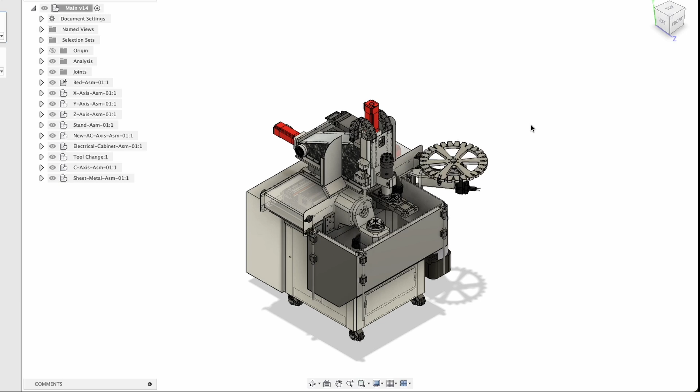This is Kasra. I'm going to show you in this Fusion 360 software how this machine that I'm designing will look like eventually. I thought it's necessary that we go through all the little details about how this machine is put together and how it will work.

So let's start with a few basics and facts. This machine is a compact 5-axis machine. All the moving parts apart from the A and C axis are made from granite, which have been machined and lapped and assembled together. The reason for granite is because it gives very good vibration dampening characteristics, as well as very good precision assembly.

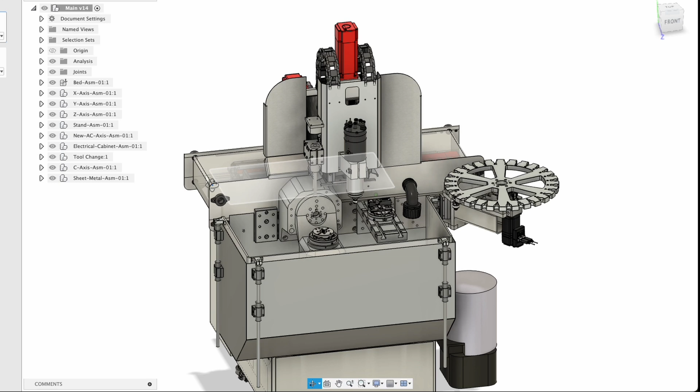The rotating axes are made from aluminium, and I will go through the reasoning behind that as well.

I spent over 2.5 years, I would say, designing this machine. Maybe 1 or 2 hours a day, sometimes a few hours over the weekend. Usually in the evenings every day I spent about an hour putting this assembly together. Obviously this is not the first version. I've been through multiple versions, and this is the one that I've decided to actually put together and manufacture.

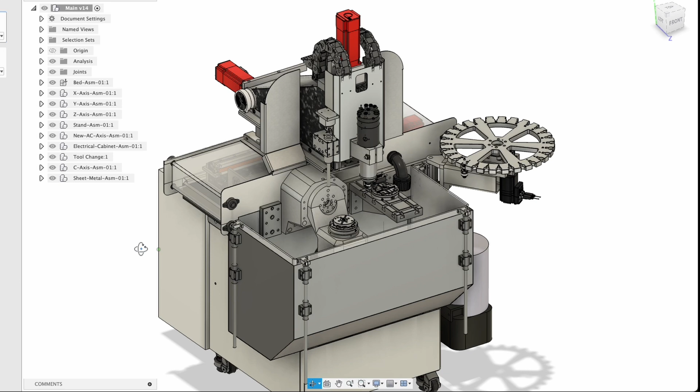Okay, let's start with the basics. So it has a stand, which I will show to you now.

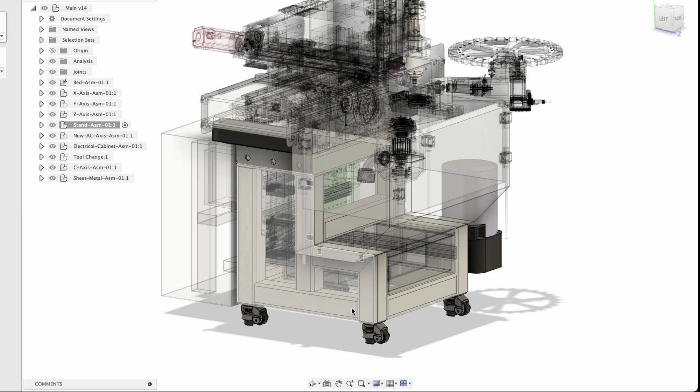This part on the bottom is just a metal frame that's been fabricated together. There are some live videos on the channel showing how I actually put this fabrication together. It's just a metal stand. There's nothing interesting really about it.

It is isolated from all the moving parts up top, so it's only holding the assembly of the machine and elevating it from the ground. So that's what it does.

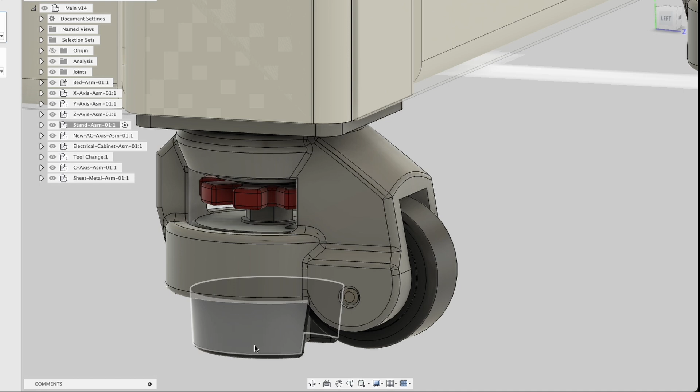It's a relatively sturdy stand, placed on these 4 casters, which have a sort of anti-vibration pad. You can raise them up by rotating these knobs, or lower them down, or in this case bring them up so that it will sit on these wheels.

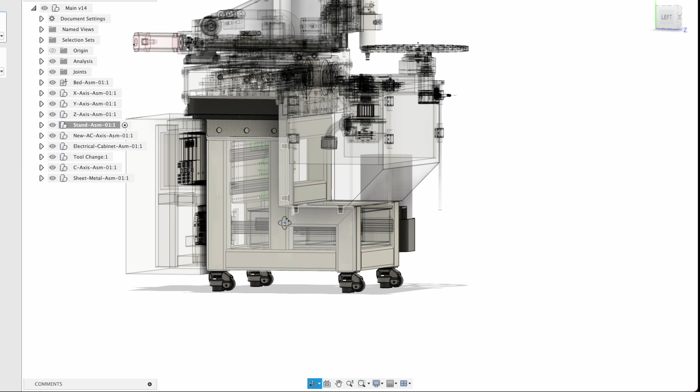These have bearings inside, and there's also a large bearing up top here, so it allows you to move the whole machine freely. Then once you are in place, you will bring these feet down and you can level the machine as well. So that's how the stand looks like.

Then we've got what I have named the bed assembly. I can probably just get rid of all of that and show you this one. I should just turn the others off, I think it works better like this. You don't need to see these as well.

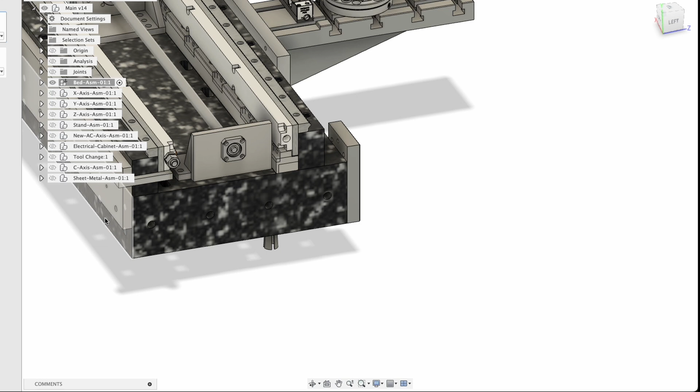The bed assembly, as I said, the main part is from granite stone. Then we've got these 2 granite parallels. This top face has been lapped, this front face has been lapped, and this rear face has been lapped as well, so these are 90 degrees to the top face.

Then we install these rails, which are quite interesting because they look like your usual X arrangement linear guideway with ball bearings that's been cut in half. We've got 2 of these.

These are a special type of rail that would allow you to have an adjustable preload, which can increase rigidity and accuracy. The actual rail itself is also pretty accurate, so the profile has been ground very, very accurately. I think I've got the reports for this particular rail, 600 millimeters long.

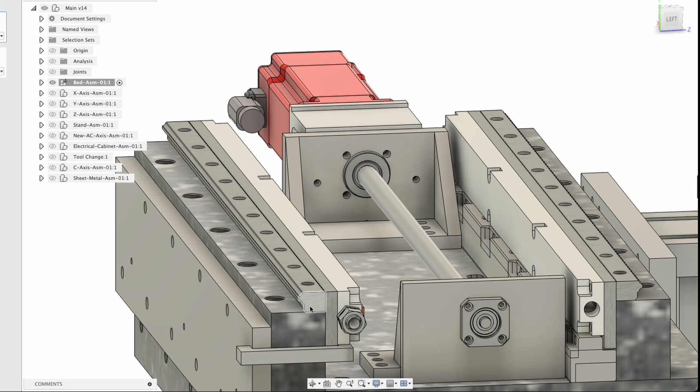For example, the thickness of the rail from this end to that end is better than 0.3 micron, something like that. And they come in pairs, so they machine these both together and grind them together, so they are pretty accurate stuff. The manufacturer is THK, a very well-known Japanese brand.

Then we've got a ball screw in the middle. This is a C0 double nut preloaded ball screw, ground obviously, 15 millimeter diameter, and the lead is 10 millimeters. So by rotating the ball screw shaft, the nut will move by 10 millimeters each time.

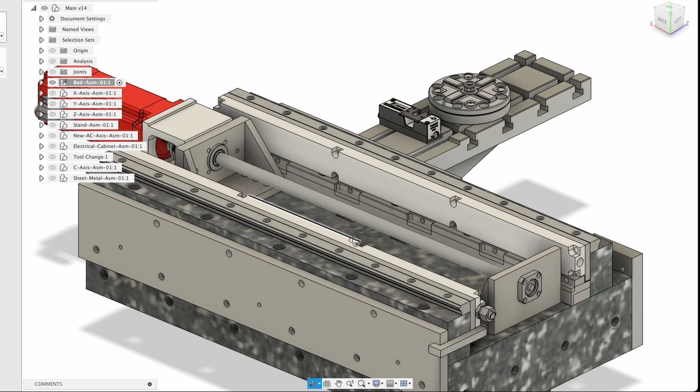Then we've got these housings for the bearings, the bearing housing of the ball screw, the support bearings. We've got a flange type over here and the flange type over there. All these metal parts are stainless steel. They've been machined, welded together, stress relieved, and then ground to a very good perpendicularity.

Then we've got this bracket, which is machined from one piece of aluminium. Then we've got these couplings, which is actually the wrong type of coupling that I used. It's not a disc coupling, it's a bellows coupling that I've used, but I haven't really changed it on the design.

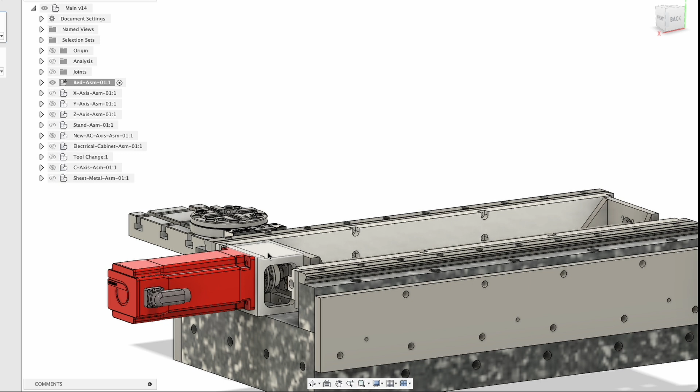Then we've got a 1 kilowatt, 6000 RPM servo motor from Beckhoff with an absolute encoder. Then we have a Renishaw absolute linear scale over here.

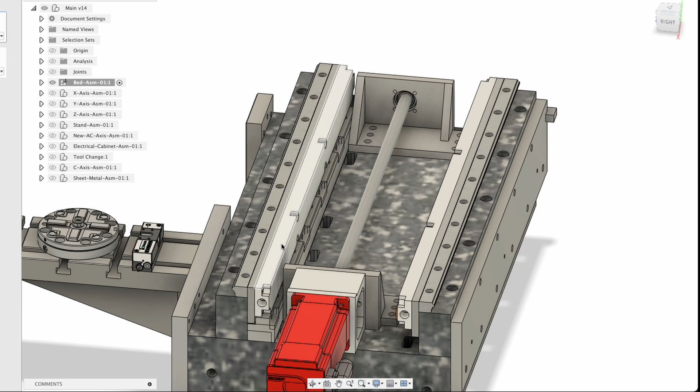We also have these aluminium pieces, this one and that one, and what these do is they have a cooling channel. The idea is to cool the whole rail down and keep the temperature controlled. They have an O-ring that goes around, and then we've got an inlet and outlet for water that goes through this, cooling this middle piece down, which is a stainless steel piece, and then the rail as well.

So that's your bed. Then on the front side of the bed, we have a couple of other plates. Then we have this sort of fixed table, which has T-slots. And there's another chuck there.

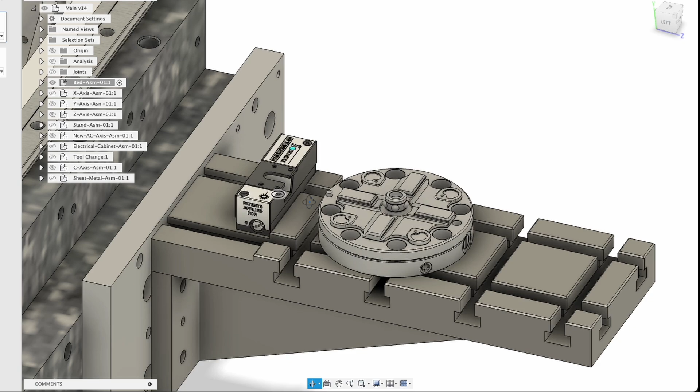Then we have the X-axis assembly. This one is again another piece of granite, which is this one. Then we have the linear blocks, so these are your linear blocks for those special type of rails. Then we have the ball screw nut, the housing of the ball screw.

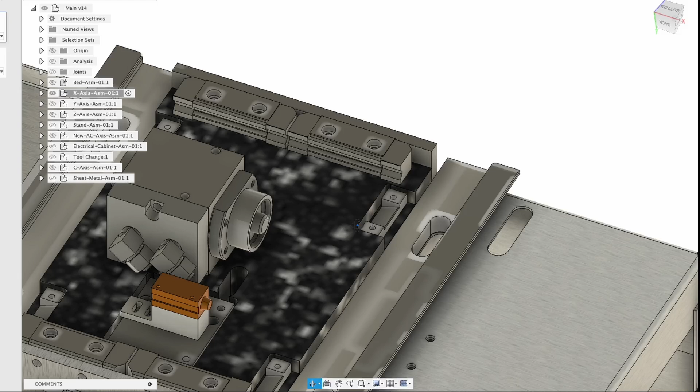Then we have another cooling pad to cool down the actual ball screw nut. Then we have the read head of that Renishaw linear encoder, and a few mounting brackets and bits and bobs.

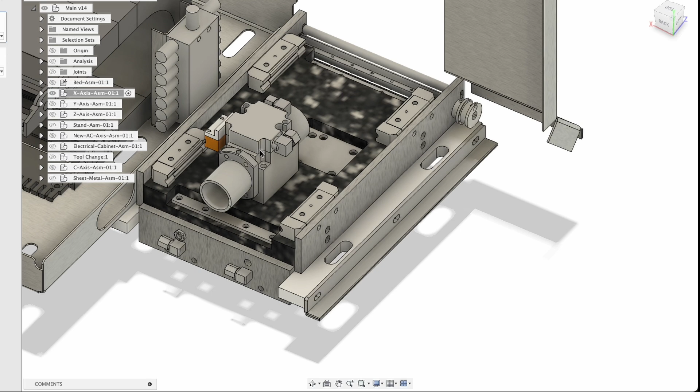Then up top we have the second axis, the Y-axis I would call it, ball screw assembly. Again, another cooling pad, another Renishaw read head, and the other blocks that we have for the Y-axis. And then we have the energy chain.

Then all of these axes are lubricated by an automatic grease pump, and this is the grease distribution unit. So yeah, that's about it for the X-axis, I would say.

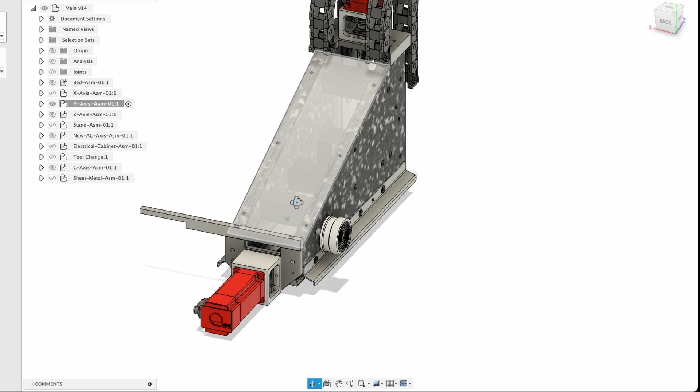Then we have the Y-axis, which is this one. So the Y-axis is an assembly like this. What we have here is a set of rails down below and a couple of other rails for the Z-axis on the front. This, again, has been made from granite, but what this has is, you can see it's got one piece there, another piece there, and a few connecting pieces in the middle.

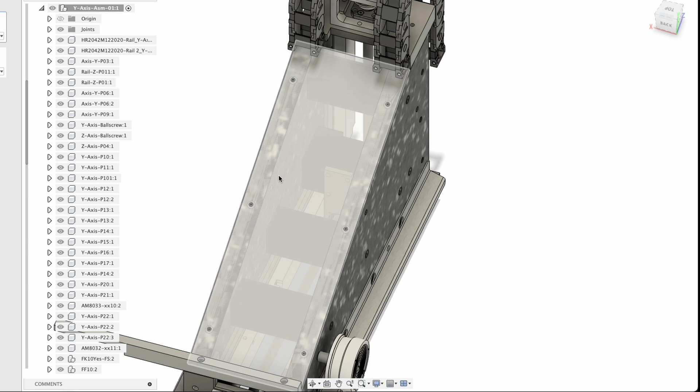If I can get rid of this part... oh, not that one... that one, yeah. So you can see these connecting parts, these are also granite as well. So my granite supplier, they made these parts first, and then they lapped both ends together. These pieces, these inside faces, they've been lapped as well.

So then they mount the whole thing together, and then they finally lapped where both of these rails sit together. For this and that, and then they lapped this front face 90 degrees from this bottom face. So it's a very accurate setup.

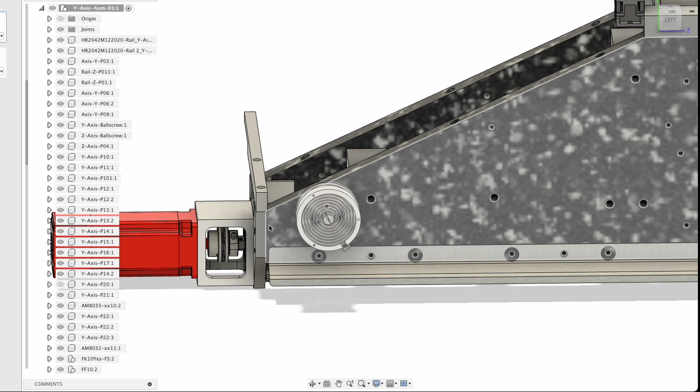Then we've got these faces, which are again lapped, and this top face for where the motor sits. So we have a similar assembly here. Again, a piece of stainless steel plate. And then we've got the bearing housing, the coupling, the servo. Then we have the ball screw, again, the other end support.

We have a similar setup for the Z-axis. The X and Y-axis have a 1 kilowatt, 6,000 RPM servo motor, and the Z-axis is 750 watts with a brake. Then we've got the energy chains for the cables and things like that. So that's about it for the Y-axis.

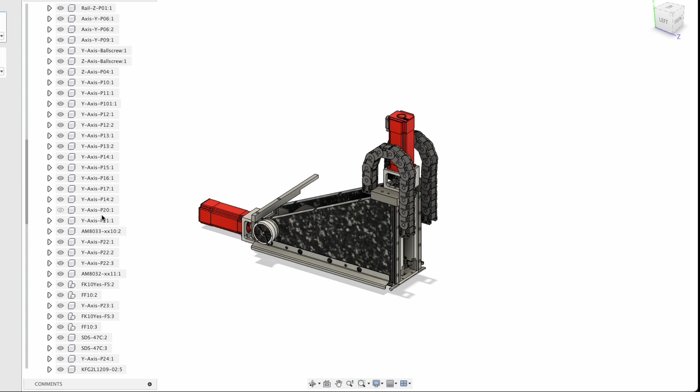We do have another Renishaw linear scale somewhere here, and then for the Z-axis we do have it as well. So let's get rid of that. Now let's talk about the Z-axis.

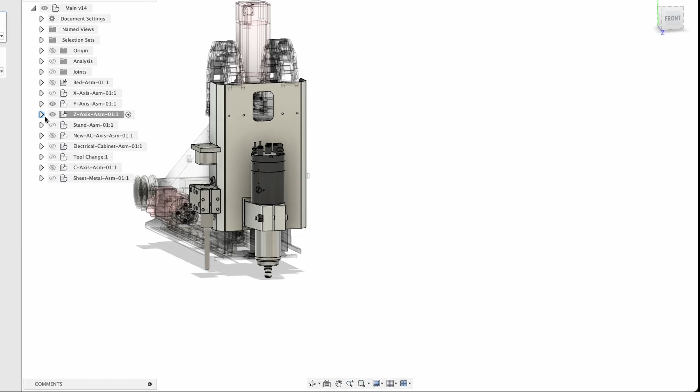So the Z-axis, yeah, this is quite an interesting one. Let's get rid of this cover first. Right, and let's get rid of the Y-axis too. Okay, cool. So first, again, another piece of granite where the blocks sit on the granite.

And then we've got the ball screw assembly, again similar setup, Renishaw read head, water cool sort of pad to cool it down, and various bits and bobs. Then we've got the spindle. This is a 60,000 RPM, 1.8 kilowatt automatic tool changing spindle, 1000 Hertz.

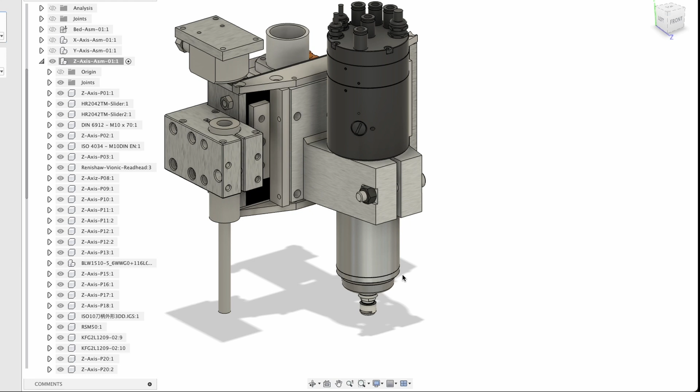This is water cooled, of course. The tool taper is called T11, which is very similar to ISO 10. Very, very little tool holder. You can get it only with ER11, so up to 7 or 8 millimeter tool shaft diameter maximum.

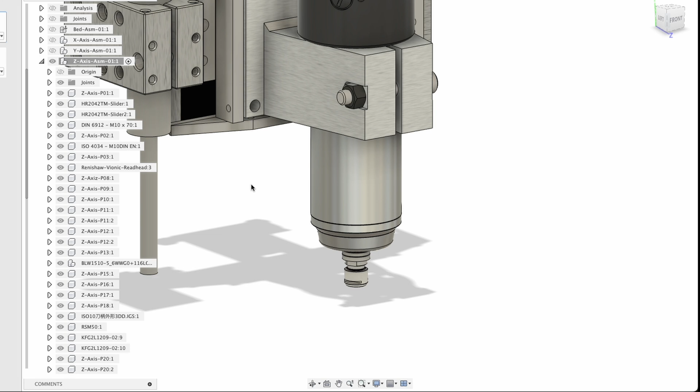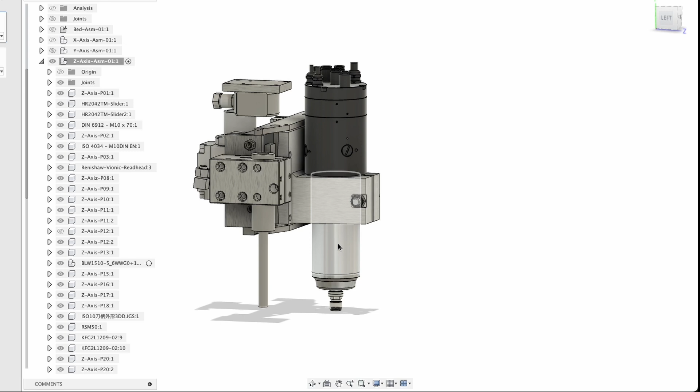Then we have a mechanism here which would allow this top plate to be floating on a lower plate. So we've got two plates over here, and we've got a curve that's been machined on both of them, and these two have been lapped against each other to have a mating and matching surface. What that does is allow me to rotate this spindle ever so slightly on this plate, to fine adjust and fine tune the straightness of the spindle center based on the actual Z-axis that goes up and down. That's for making the spindle parallel to the Z-axis from this view. So you can imagine it will rock backwards and forwards like that, ever so slightly, of course.

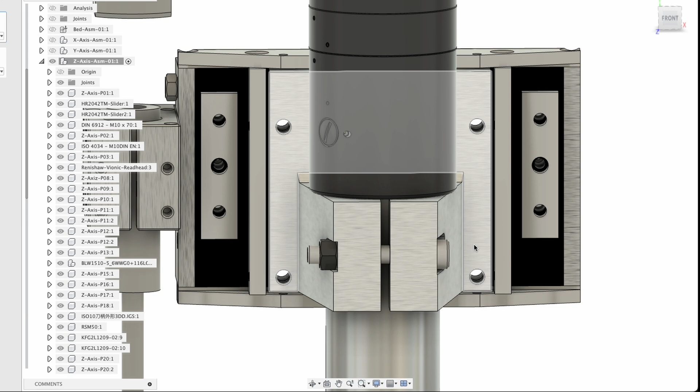But we also have a similar mechanism for rotating it from this angle, where both of these plates will rotate at the same time, and we will use a series of grub screws that hold this whole thing together to fine adjust that. Once that's done, we just tighten these bolts, and then it will stay in place completely solid, because all of these grub screws are holding it as well.

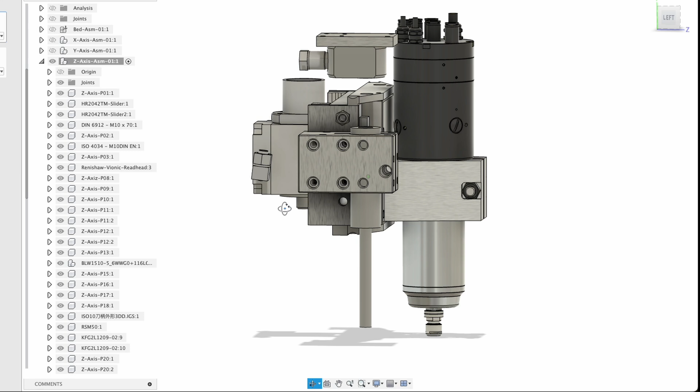Then we have this assembly on the right hand side. Because this is a turn mill machine, this will allow me to hold turning tools, so just one insert turning tool if I want to do some lathe work on this machine. It's an assembly that would allow me to change the tools automatically for the lathe option as well. It's got a 5-ton hydraulic cylinder up top, and then there's a sort of spring mechanism that would release this tool, which I haven't really finished designing, but these parts have been made. So this side of it is fully completed.

Okay, let's go and bring the rest of the machine. Again, display the whole thing. X-axis, stand.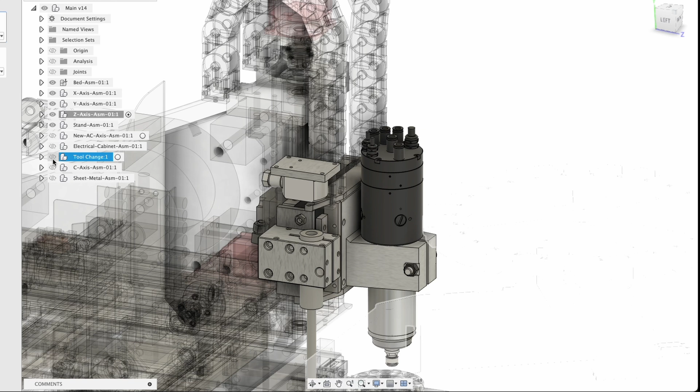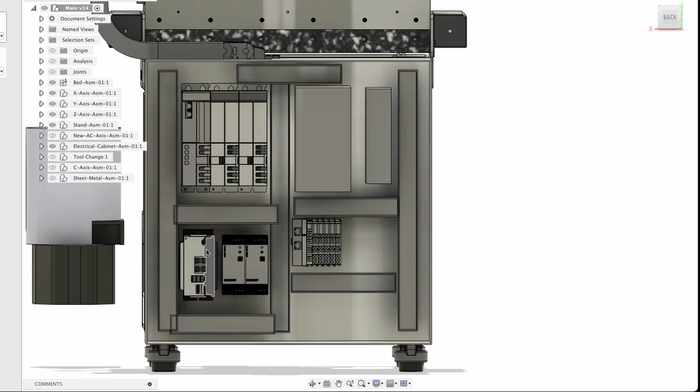We've got the electrical cabinet in the back, which is here. So we've got the Beckhoff drives, the power supplies. These are for the rotary axes, some EtherCAT modules, and this is the brains of the whole operation, which is the controller. Again, another Beckhoff computer, IPC.

Okay, let's talk about the A and C axis. These also have been made with a very high precision in mind. So this is this assembly.

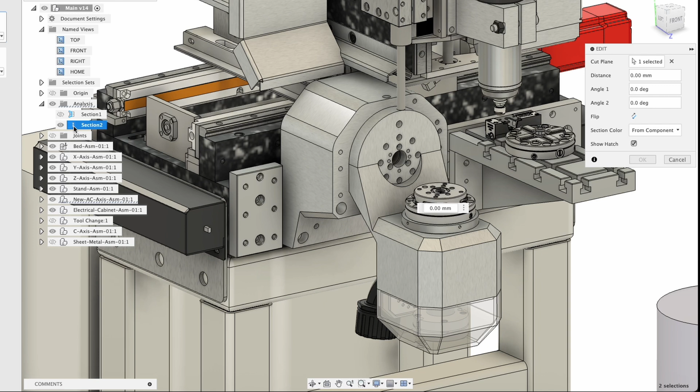Let me actually show you a section view. I would say that's a better way to show this.

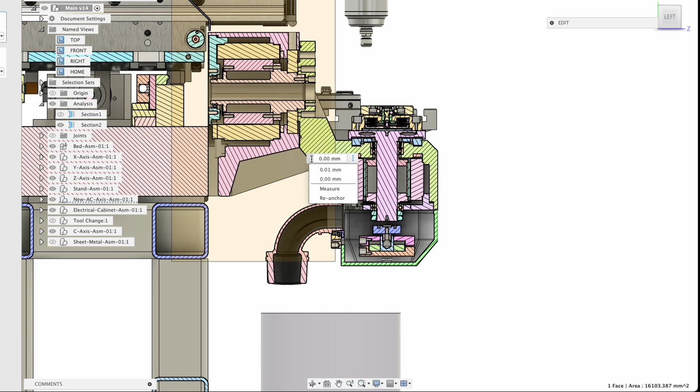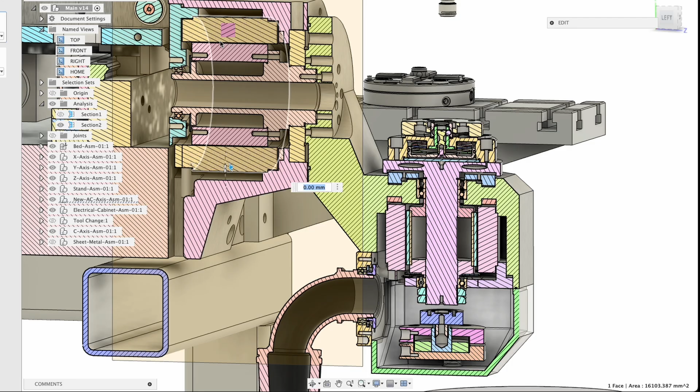So let's talk about the A and C axis from a section view, I think it's easier. So the A and the C axis, they have what I would call a torque motor setup. There is no gearbox to drive these both axes. There's a torque motor here and another one here. These are water-cooled torque motors. They have been manufactured by a company called CPC in Taiwan. I've used their other products for quite a few years, and I quite like the quality of their kit.

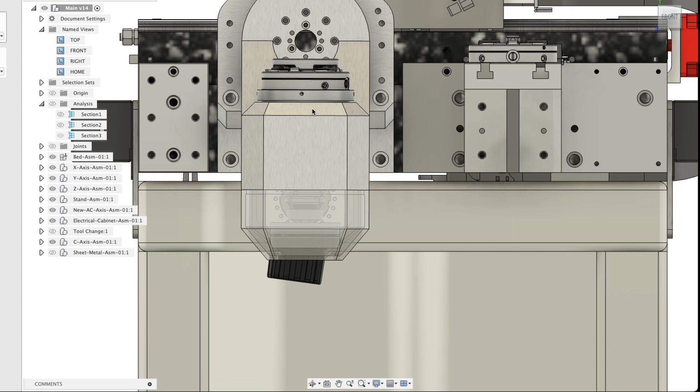Let me just create another section analysis so I can explain this better. What I want to do first is to pin this so it won't move, so it's not moving around, so I can explain the C-axis probably a bit better.

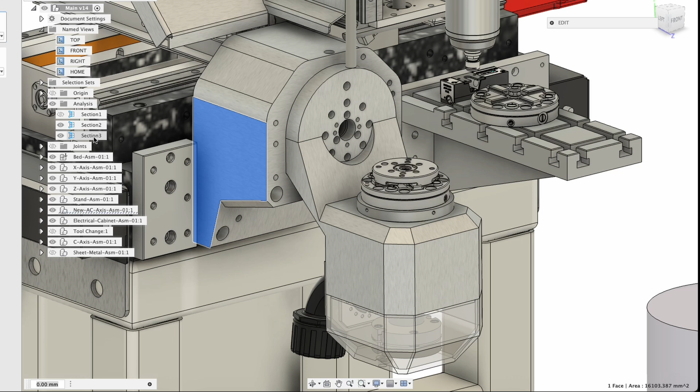Right, okay, let's go back to this section view, or this one.

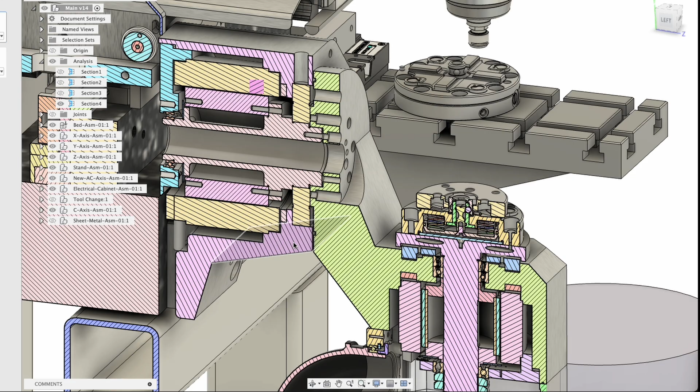So the A and C axis, as I said, they have been manufactured from a single block of aluminium. Then the rear face was lapped, and then we got the front face where the bearing sits, and this front face and this diameter for the bearing. We got them jig ground on a jig grinding machine.

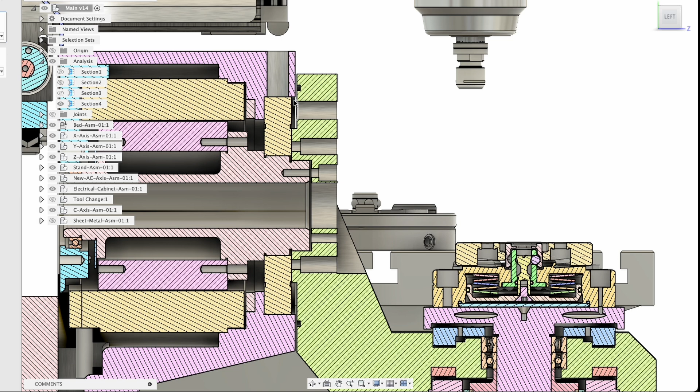And then there is a bearing, which is this one. It's a cross roller bearing, super precision bearing, extremely accurate. It's actually the most accurate one that you can find on the market. Then there will be an O-ring sealing this face, so no debris or anything can go near the bearing. It doesn't really need it, it's got plenty of protection on its own, but that's just another sort of peace of mind, if you like. Then we have the stator for this axis, and then there's the rotor for this motor.

This cavity, the space, is for a copper coil that will have coolant through it to cool this whole assembly down and keep the temperature regulated.

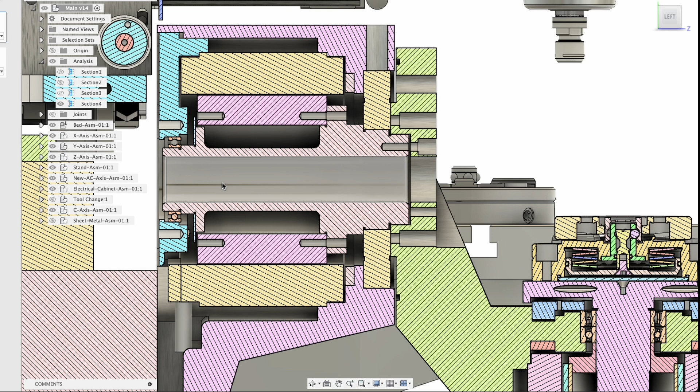Then we have this transmission shaft, which will go through the bearing and hold on to the rotor as well. On the back side we have this, which is a 1mm glass disc.

This glass disc is the encoder for this motor, and that's the encoder read head right there. Then we have another bearing just to hold this end part of the shaft, and then we have a cap, which is a housing for this bearing, and it closes the whole thing off. So that's your A-axis assembly.

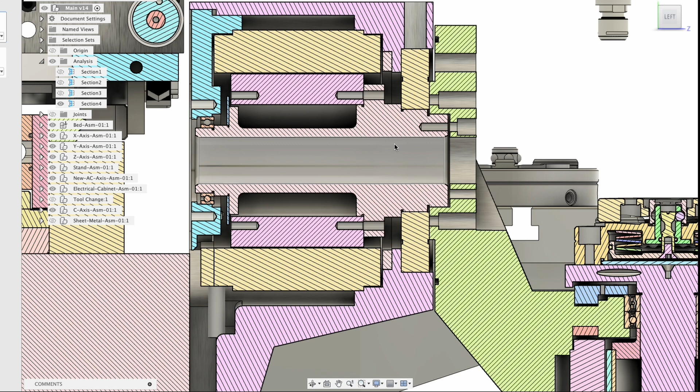There are pretty tight tolerances for this shaft and also this housing. So this shaft has been ground very, very accurately. The perpendicularity, cylindricity and all of these different tolerances have been ground, most of them to 1 to 2 micron, which is pretty accurate for this size of part.

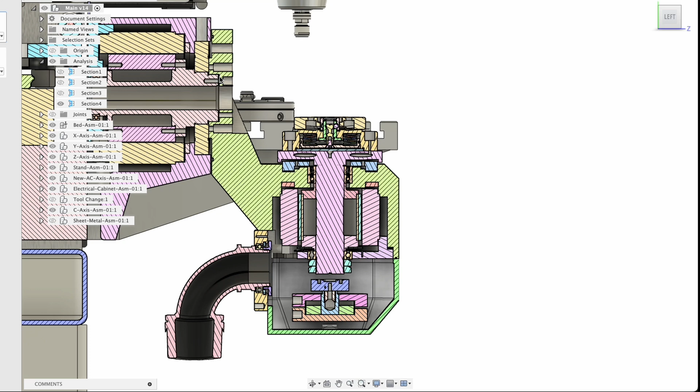Then we have this C-axis housing. This one is also made from aluminium, again jig ground. So we've got where this face sits against the bearing, the cross roller bearing, and also this diameter, they've been jig ground relative to where these bearings sit. Then we have the C-axis assembly.

The C-axis assembly is a little bit more complicated because we have an automatic chuck here. This is by a company called System 3R. And what it does is it will allow you to change the workpiece.

Using a pneumatic action. So this top pallet, this is a pallet that you can exchange very, very quickly just by push of a button, or in the future when I put a robot in front of the machine, completely automatically.

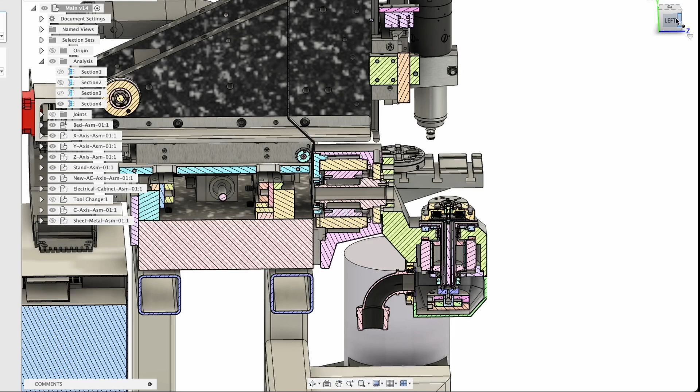So for the action of that pneumatic chuck, we needed a system to activate that. From the inside of this transmission shaft, which goes through these angular contact bearings, again super precision stuff, goes through the motor and goes through this bearing.

Then below we've got this assembly which will activate this pneumatic action. Right? So how do we do this?

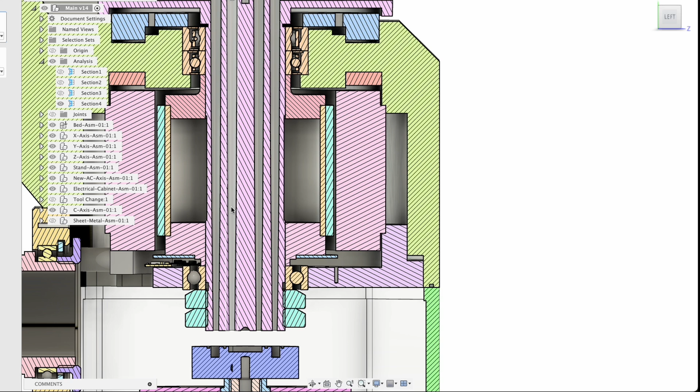So we've got this pneumatic cylinder here, and we've machined these holes that you can see go all the way up to the side and up through here. These are a series of holes that intersect each other, and they go to this System 3R chuck.

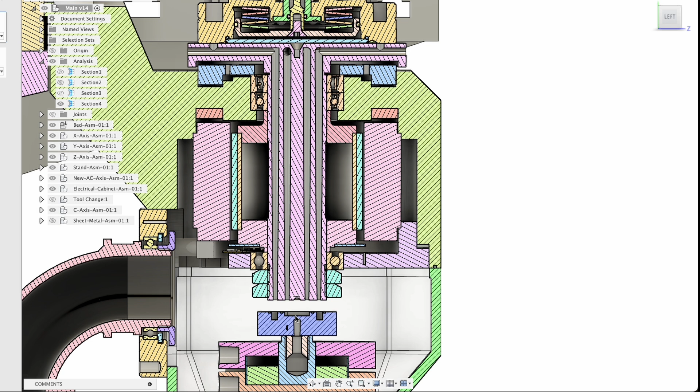Then down below, as you can imagine, this whole top face will be rotating, and this is a 7,000 or 8,000 RPM motor. So this is rotating very, very fast, and we can't have air channels going through this unless we use a big rotary joint or rotary union, which are very tricky to make, with high maintenance and quite expensive and not very reliable.

I've used them in the past and I don't really like them. I try to avoid using them whenever possible. And that's when I came up with this system.

So I've got here this face and this part. What this part does is it has two separate channels, you can see here and there, and these will create an air pocket, and then we've got an O-ring there and an O-ring there.

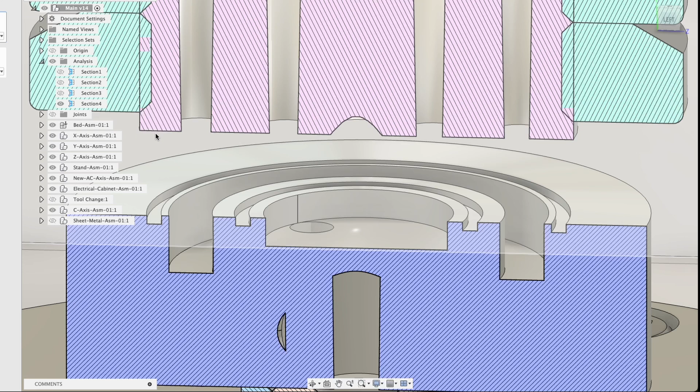These O-rings will sit on this part of this shaft and this one on this part of this shaft, and what it creates is actually two separate channels or lines for pneumatic air to go through and then come up and go through the chuck.

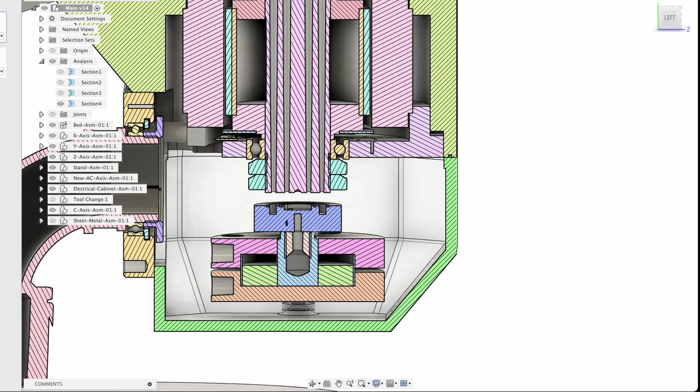So when the chuck is rotating, this piece is like this, down, no action, no air is passing through. But when you want to change the part, this is a very big pneumatic cylinder.

Again, it's got an air inlet here. So we push air through this. This will activate, go up, create a seal around this, and now I can push air from these side holes up to these channels and then release the pallet or the mechanism to hold the pallet.

And then once you've changed the pallet, this whole thing goes back down, and then there's no contact between these two parts. I call it a clever system because it allows this part to rotate at a very high speed without the need of a rotary union.

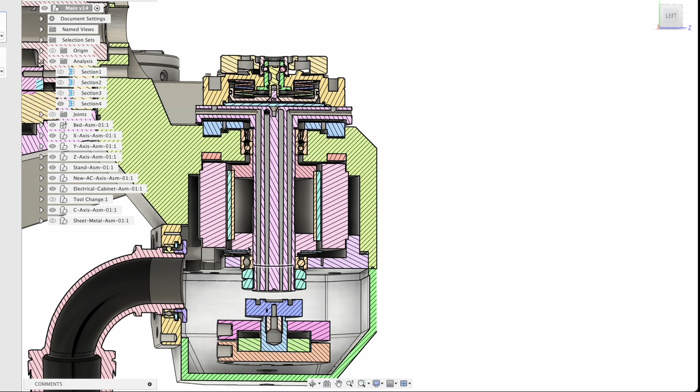Then we've got a copper coil around this space and a very similar setup, another bearing. It won't have these two nuts. It will have a high-speed type single nut with a side lock.

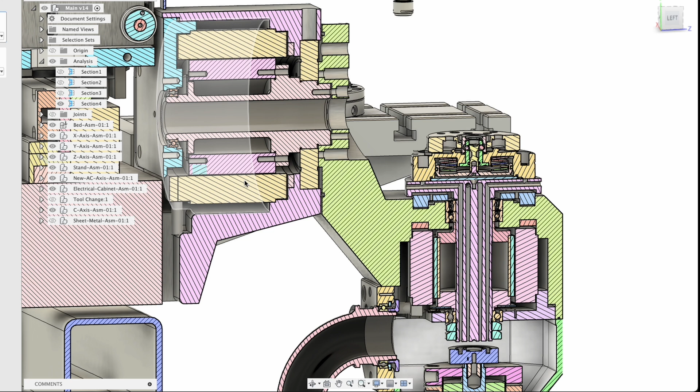And then we've got the cabling issue. Now ideally for a setup like this, you would want to have the cables for the C-axis go through the A-axis. Even though we've got a relatively large opening, we didn't want to use it like that and move all these cables through the A-axis. Reason being, when you want to twist all of these cables in a relatively short distance, the cables can break very quickly, so you need to change them frequently. So we didn't want to do that.

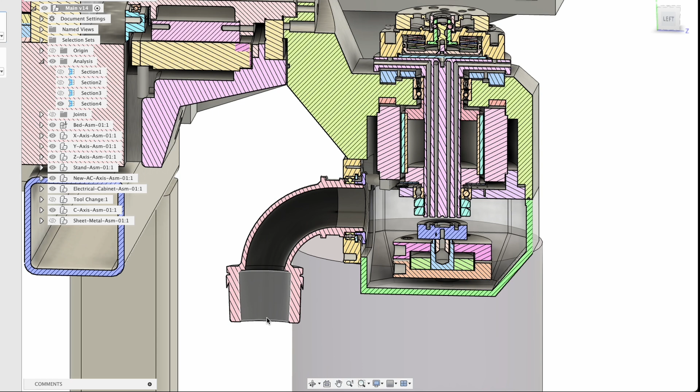And we ended up doing something that I really disliked, but was necessary - we used an external system. So this will have a conduit fitted to it, and then the other side of the conduit will go onto another sort of gland over there, and then we will have a conduit sort of dangling down below. It's not pretty, but also I didn't make this machine to look pretty.

It's, yeah, the looks of this machine is not pretty at all. It's quite industrial and without a focus and attention to sort of looking nice, but it is quite functional, and functionality was what I was after, not to make it look like a very nice product.

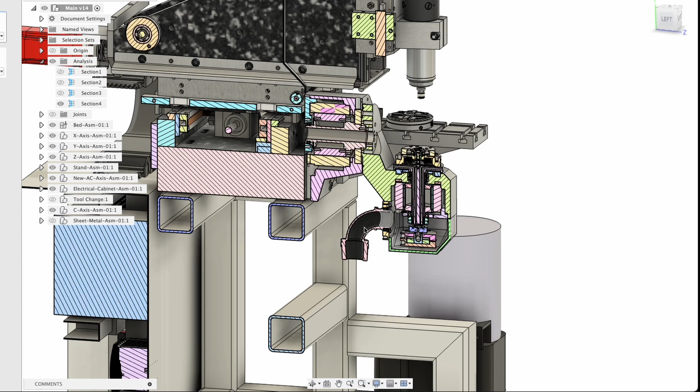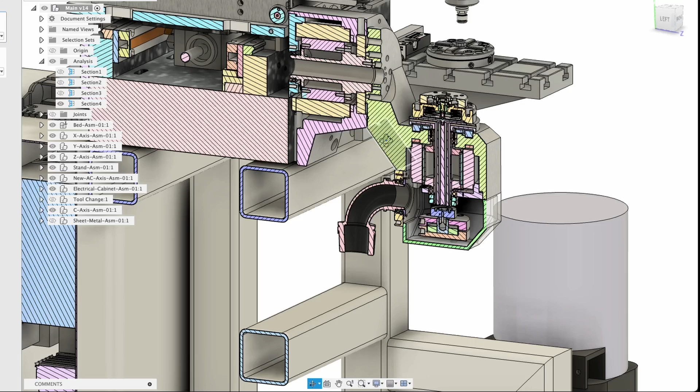So it's functional, reliable, because obviously these are all fixed - it's not rotating, things are not twisting. We will have only a 45-degree movement for this gland, as opposed to an almost 270 degrees twisting motion for the cables up top. So it will have a much longer life than if I wanted to move the cables through here. With that said, I've kept this hole open so that in the future maybe we want to use something different through this, and feed something different through the middle of this A-axis, so we'll have that capacity.

Okay, so let's go back to the other parts. I probably should get rid of this section view.

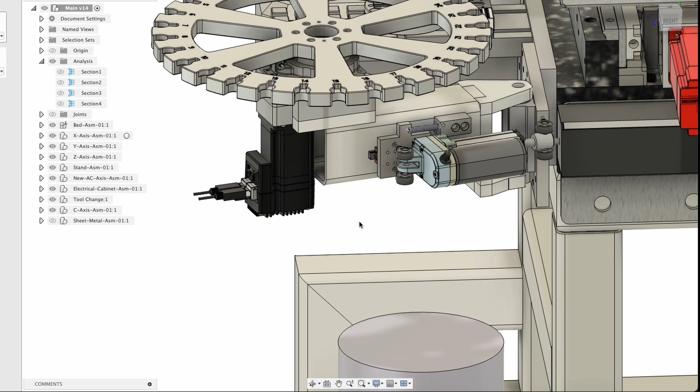Then we have the tool changer mechanism. The tool changer is mounted on an arm, this moves back and forth like that. It will have its own electrical actuator - I think there's a joint, something missing here. So this is an electrically activated actuator with a spring mechanism to push it all the way through. Then we've got one of these hollow shaft gearboxes with probably about 1 arc minute of backlash, which is more accurate than what I need for this axis.

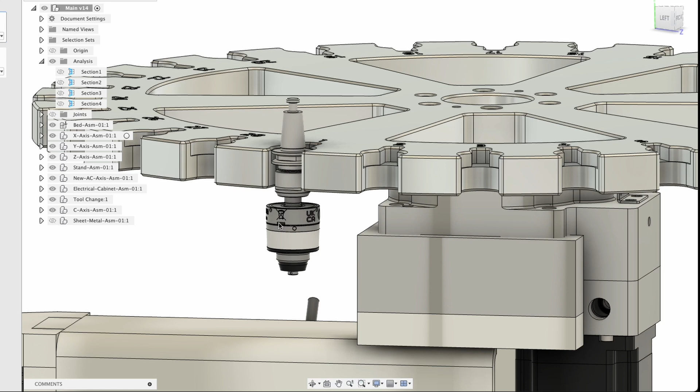Then we've got this sort of wheel setup with 28 pockets for tools, and this is the tool holder. I've got here a Renishaw RMP 24 micro, which is the smallest wireless probe you can get in the world at the moment. So this will go onto the spindle, and we will have an automatic tool changer with 28 pockets in the magazine.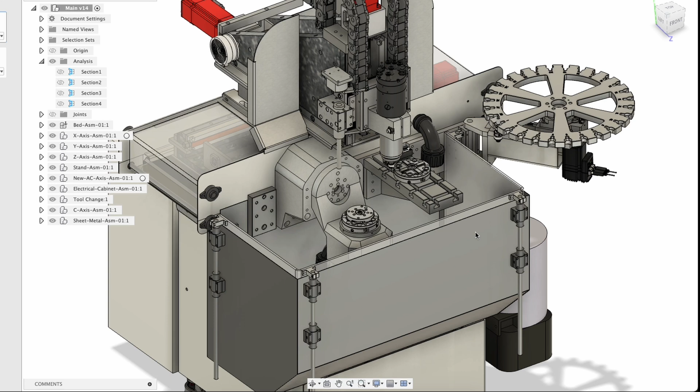Let's look at all the sheet metal work as well. So these are all the sheet metal side of it. Once this is all the way back over there, we will have a polycarbonate guard around it. I probably should bring the Z-axis cover as well. Just bear with me. Right, okay. Looks a little bit better now. As I said, looks were not the main concern for this machine.

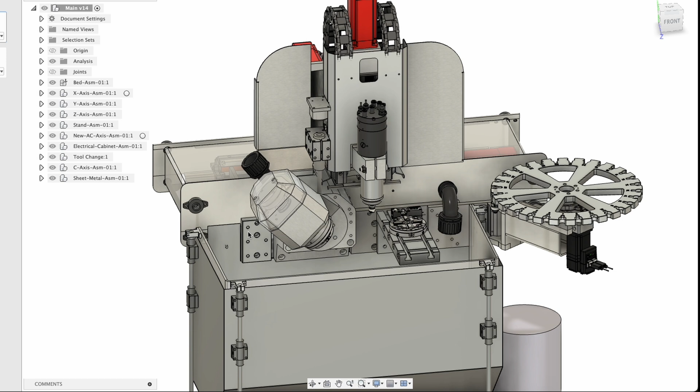So this is the C-axis, as I said, it will rotate like that. The A-axis, I don't think I showed you that. Let me just go to this assembly and unpin this part like so. Okay, it should rotate, let me just bring this down. So this will rotate almost to, I think, something like this - yeah, definitely like this - and then from the other side to somewhere around here. So it's got about 180 degrees of travel.

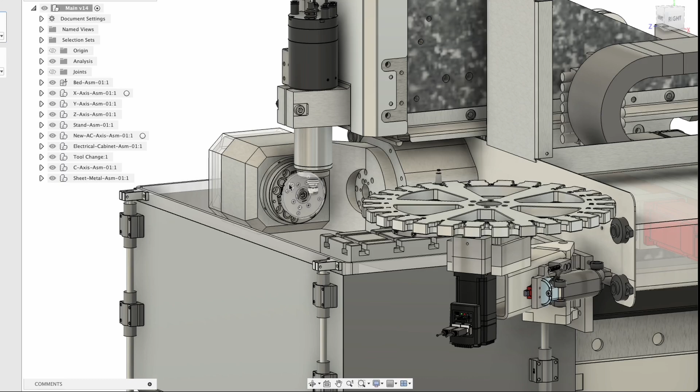Most of the time it will be like this, where the spindle comes and starts sort of milling, or if you've got some turning application, the other tool holder will come in and you will do some turning like that.

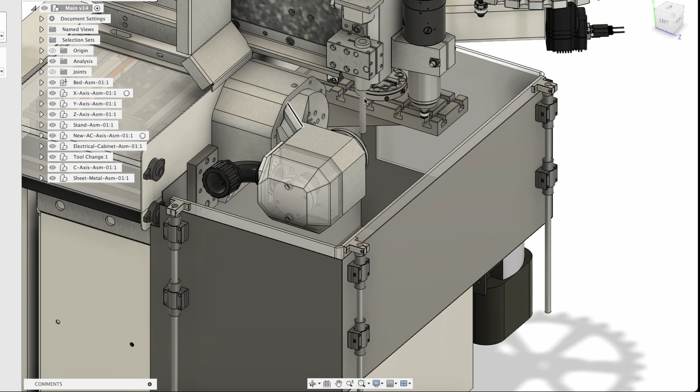It's good to say that the spindle actually, you can shift the spindle up - you can just unscrew this or loosen this, and then push the spindle up and then hold and tighten this in place. Then you've got this tool holder for your turning tools. So if you want to do some turning, put a thread on a part, we will eventually have a space over here where you can park probably 2 or 3 of these different tools for your thread cutting and for your grooving or cut off or things like that. So we will have eventually 3 or 4 different tool holders for the turning tools.

Then we've got the spindle. The spindle actually, even though it's pretty small, it is a closed loop spindle, so we have an encoder. So if you want to do some guilloche patterning and things like that, you can use a single edge tool on this spindle and hold it in place, because it's got 1.8 kilowatt and it's water cooled, so you can hold it firm and steady to do some pattern and guilloche pattern machining. So this will be most of the times like this, or sometimes like that.

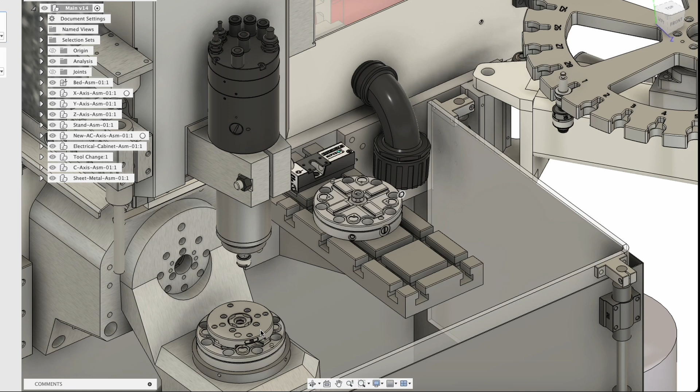Then you've got this fixed table with another set of these. If you're doing a lot of 3-axis work or some roughing, you wouldn't want to put it on this table, because it will put stress on the bearings. So for 3-axis work, you can just use this table, or get rid of it. If you need a vise, you can mount a vise, or just put a part directly onto the bed itself. So there's various options you can use this table for.

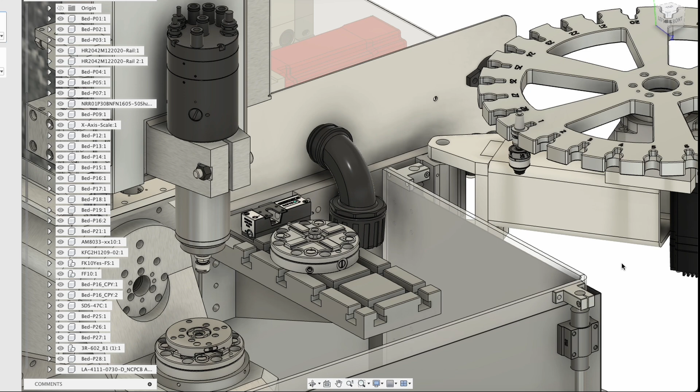At some point I will probably make another assembly of another table, a 90-degree table, with a bigger, thicker plate joining both tables together, so you can put a massive part, about 400 by 200 millimeters, on the machine and CNC machine that in a 3-axis way. But this is a pretty accurate machine, so doing that with that massive size would be pretty interesting. So it's got a lot of versatility.

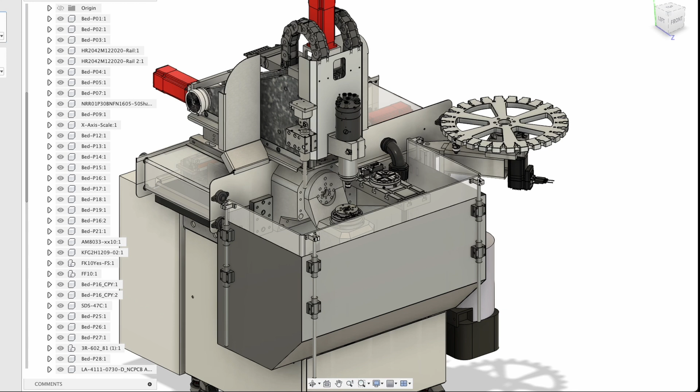That's the other side of that conduit, for the cables. Then we have this polycarbonate system that goes up and down, so it's just a shield.

It will have actuators to activate it, it won't be manual. So when the machine wants to do a tool change, this will go down. It takes about 1.5 to 2 seconds. And then this will come in, and then the spindle comes here. That's where position number 4, for example, is. That's where you can change your tool.

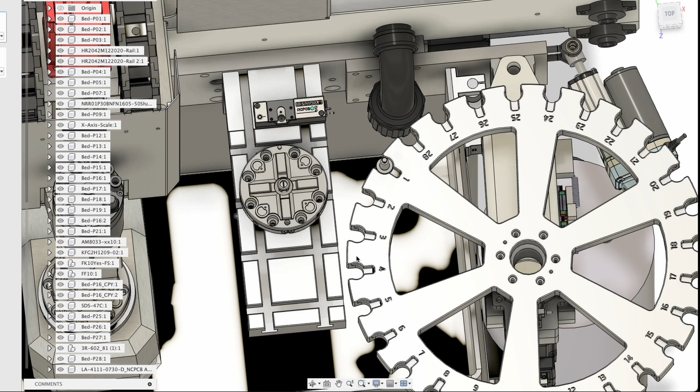So it picks one of the tools up, or basically now it just drops its current tool, goes up. Then this one rotates like that, brings the other tool, and then this can pick it up and go back. And then this will go back like that, and this one comes up. So that's the sequence for your tool changer.

This is just a grease pump. Then underneath we've got the coolant tank, which has separate pieces, and the coolant pump. So it's got one of those different level filtration systems.

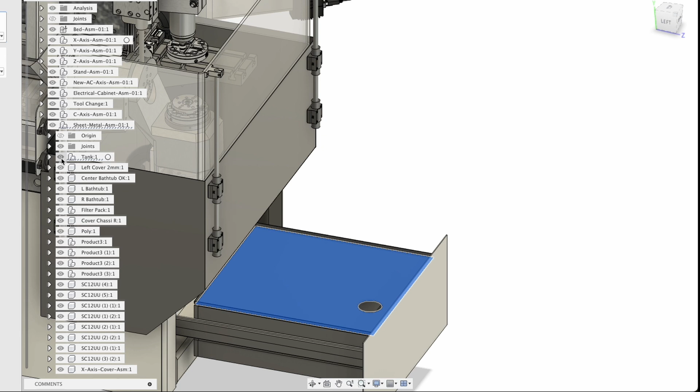Then the coolant tank is also thermally isolated. By that I mean there are insulation panels all the way around the tank, so the temperature of the coolant will stay stable, and the coolant will also go through another chiller, a separate chiller, and then goes back in.

Okay, then we've got another drawer like here for different filters. So we've got 2 micron filters for the coolant, and a few other solenoid valves and things like that mounted over here.

Then the whole machine will go into another double glazed window type of enclosure, so it won't have any thermal interactions with the actual environment, and that chamber will be cooled down by an AC unit.

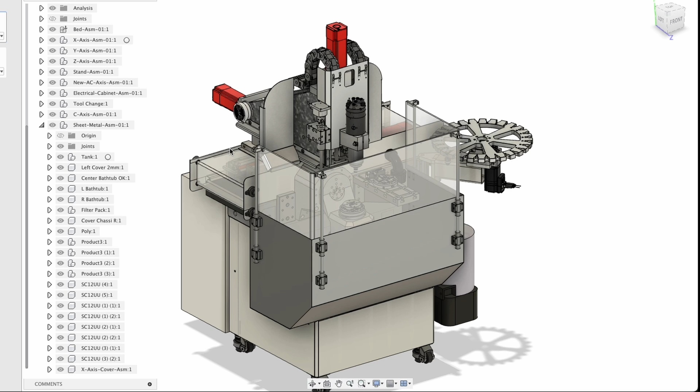So effectively we've got one chiller for the spindle and the A and C axis, one for the ball screws and the linear guides and all those cooling pads I showed you for the X, Y, and Z axis and their ball screws. Then we'll have another chiller for the coolant, and an AC unit for the whole chamber. So 4 chillers effectively working together to keep the temperature relatively stable.

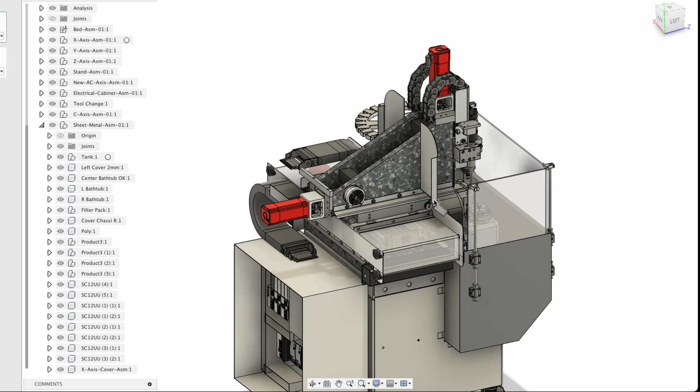We've got other mechanisms, for example another spring mechanism. Then we've got these roller way covers. There's another mechanism for way covers in the front, so this will be covered up as well, won't be exposed to the elements. There's a lot more to tell you, for example how this whole thing is floating on this frame, so it's not actually connected. As I said, it's isolated, mechanically isolated.